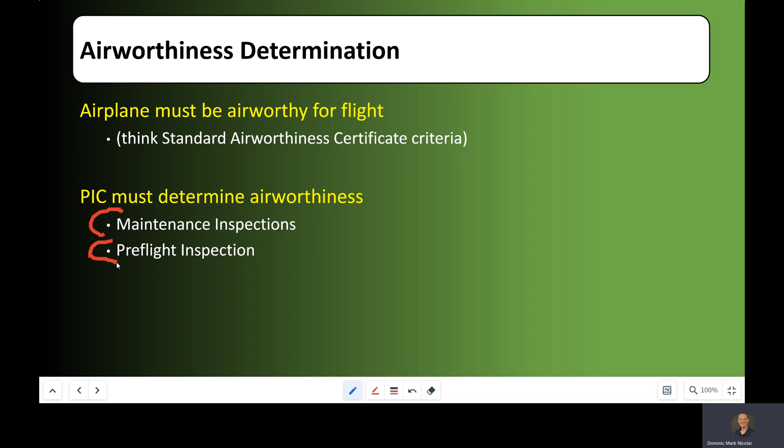Now, here's the thing that's going to be different for a lot of you. Right now, you are flying in the Western world of aviation, where we do a lot of things for you behind the scenes. Out in the real world, it's called general aviation out there. You would be responsible for looking through the logbook of the aircraft you're going to fly, making sure it has all of its required inspections done, maintenance has been done, etc. That's in addition to your walk around.

So here's the graph that it looks like here. There's really 6 different areas of the regulations that specify what a pilot needs to do to determine airworthiness. Let's start with the aircraft logbook evidence over here. First, we're looking for the inspections that are completed. AV1ATES is the typical acronym that we use for these inspections.

Next would be airworthiness directives. They've been complied with as well as logged. And the third one here is preventive maintenance, alterations, and inoperative equipment has been logged properly in the logbook.

That's something you don't normally do. It's something that we have you do at the check ride point because the examiner is asking you to prove airworthiness.

But this is only half of it here. In addition to the aircraft having been maintained properly, you have to do the pre-flight inspection. And the reason you're doing that pre-flight inspection is because you're trying to find things that are wrong with the airplane. You know you just can't stop and pull off at a cloud and figure something out if it's broken, right? You're just making sure everything works properly on there.

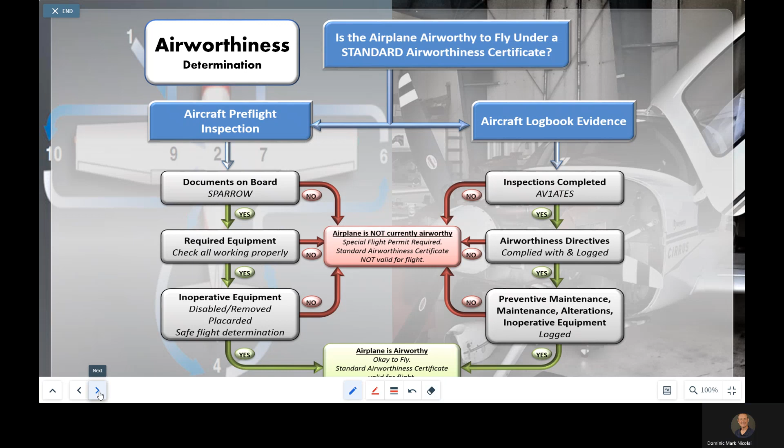Your standard airworthiness is valid for that flight. You have authorization from the FAA to conduct flight. All right, and we'll get into some more of those inspections a little bit later in the regs here.

Continuing on in subpart A, dealing with dropping objects. The FAA's got interesting regulations because they often tell you, well, you can't do something. And then they give you the exception to the rule. Right? And this is one of those examples here with dropping objects. They say, no, you can't do it. But then they come back and say, unless you do something else. Unless you take precautions to avoid injury or damage to property, then you can drop things from the airplane. So the FAA's got an interesting way of dealing with regs.

Okay, so let's try a top hat question here, dealing with dropping objects from airplane. 45 seconds here.

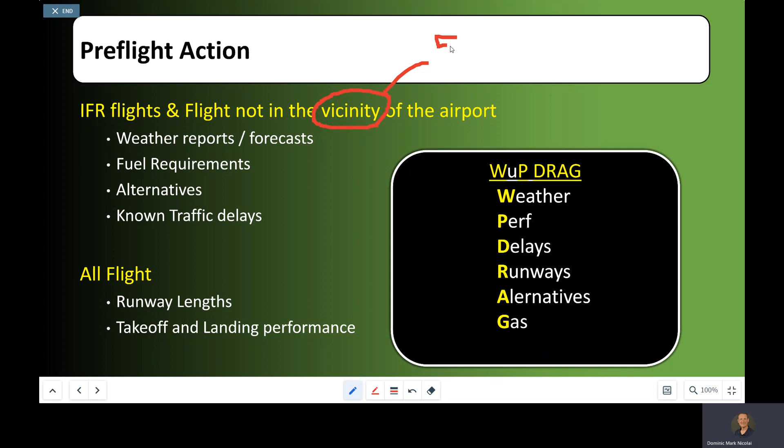My only guidance to you is from our METAR and TAF reports. METARs and TAFs will go out to 5 miles. That's my only guidance, all right? So when we talk about in the vicinity of the airport, in my opinion, if you're within 5 miles of the airport, you're in the vicinity of it. You go beyond 5, you're no longer in the vicinity.

Okay, so if you are going away from the airport or on an IFR flight, you must get weather reports and forecasts for the time of the flight. You must understand your fuel requirements, how much do you need versus how much do you have, what's your burn rate. You must have alternatives if your planned flight cannot be completed. This should also include days where potential for a crosswind makes your runway no longer usable.

Any known delays usually get passed along in your pre-flight briefing. So this is required information for IFR and anything that's not in the vicinity of the airport. Regardless, every single flight, though, you must know the runway length for the runway you intend to use, and you must know your takeoff and landing performance.

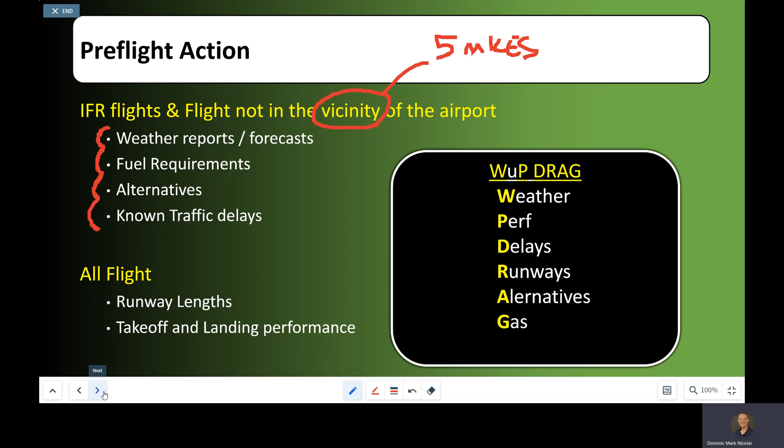And so here's your top hat question. True or false? A flight only in the traffic pattern requires the pilot to get weather reports and forecasts.

Wow, true or false? So it's an interesting question. I'm going to say it's a gray area. I like when regs are black and white. Definitely a gray area, because we do have a reg elsewhere that says you got to become familiar with all available information for any flight. Then we have this reg that says, well, if you're staying near the airport, you don't need weather forecasts and reports. So...

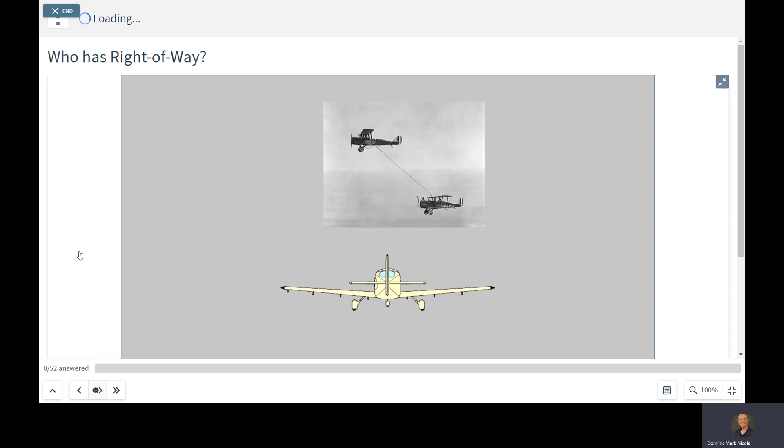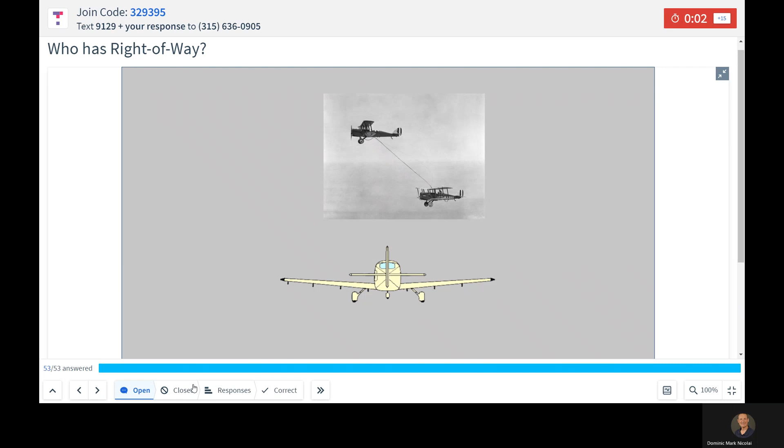Who's got right of way? This is a refueling operation. Are they plowing the ramp out there? Blowing it off? Jeez. All right, a refueling operation. While they're tethered together, they are less maneuverable.

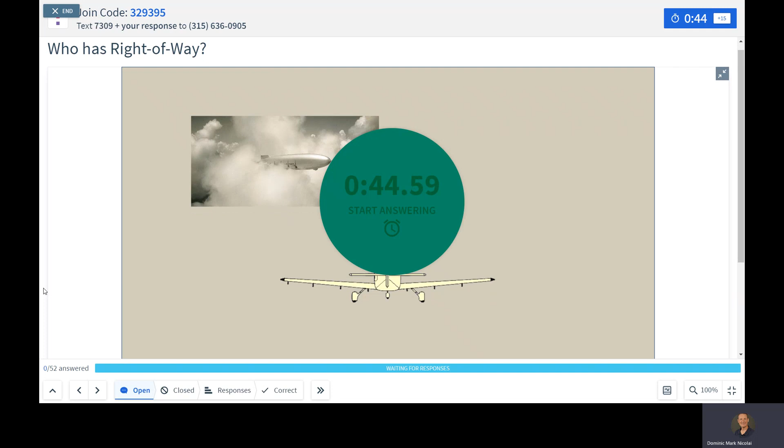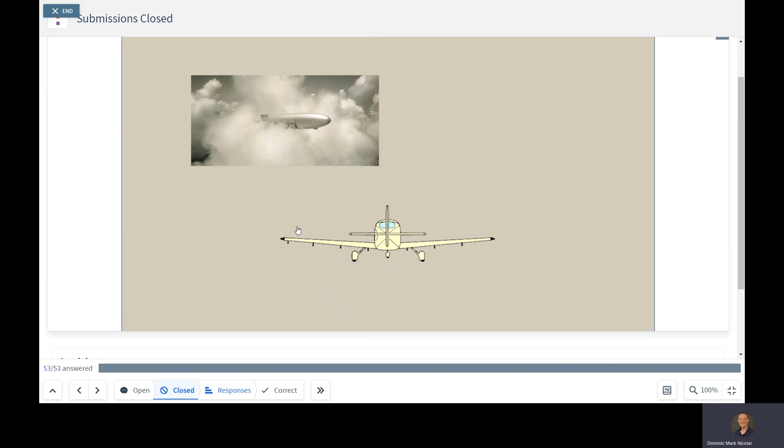Let's try another one. Who's got right of way? You're flying through the clouds. That's what you see. All right, the other aircraft is least maneuverable. So you got that one right. Nice job.

All right, here's another interesting one for you. That is an electric aircraft, solar-powered electric aircraft. You are looking at the tail of it as it's trying to fly away from you. Oh, the other aircraft is a slow-moving airplane. You have to yield to the right side.

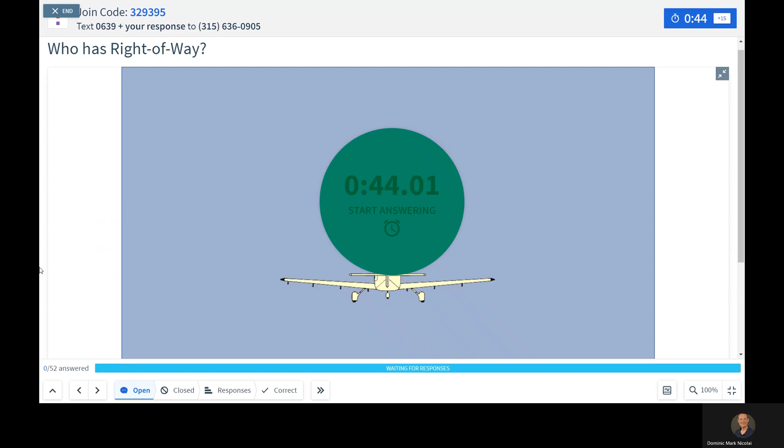All right, last one. We're looking at the front end of an airplane. You should recognize the head-on situation. No one has right of way. Both alter course to the right.

Next area is airspeed. Look at maximum airspeeds here. You can see how well you know these. So when we look at our different airspeeds, we are looking at one area that is above 10,000 feet. There's another speed when you're below 10,000 feet. And then if you're within Delta and Charlie, or below Bravo, there's another speed restriction on that. So those are the little areas that we're going to look at here.

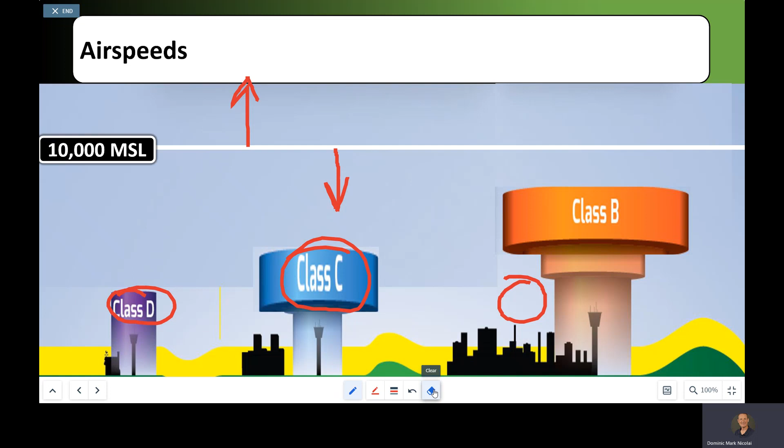I'm going to start with maximum indicated airspeed, and we are in the purple area, 10,000 MSL and above. You got some choices down there. We like to fly fast when we're above 10,000 feet.

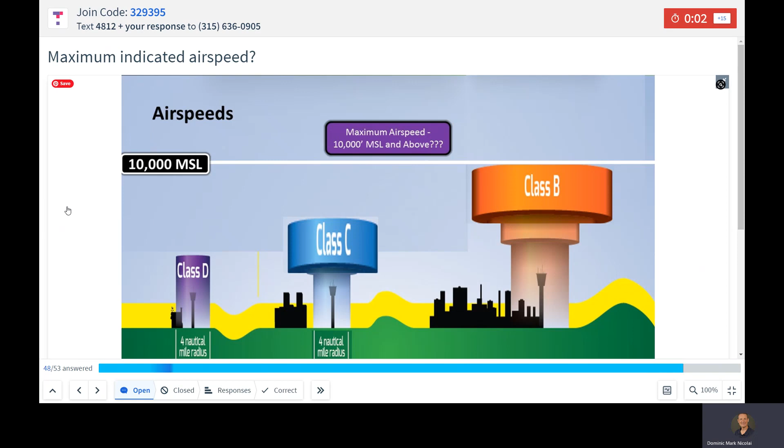All right, a bit of a split there. So the correct answer is less than Mach 1. We do like to fly fast, but we can't do sonic booms over the continental US. Now, military aircraft can do it in special areas, but otherwise we cannot. So we've got to be less than Mach 1. Once you get beyond the shore, then we're allowed to accelerate above Mach 1.

Maximum indicated airspeed. This area is within class Bravo below 10,000 feet. You're inside the Bravo, but you're below 10,000 feet.

Okay, see how you did here. No, big split there. If you indicated 250 knots, that would be correct. There are no speed restrictions in Bravo airspace. The speed restriction that's applied is when you're below 10,000 feet, you have to be no faster than 250. But there's no speed restrictions inside the Bravo, so we just default back to 250 there.

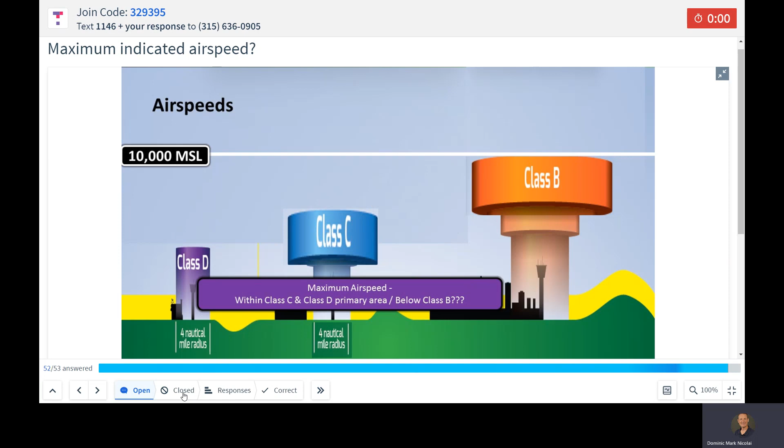200 knots. That is correct. Well done. Okay, I'm going to get through a few more things here.

Subpart B, clearances. When given by ATC, clearances or instructions, they need to be followed.

Now, of course, you as pilot in command are responsible for the safe operation of the aircraft. You might be in a situation where it's an emergency and you can't comply with instructions. Or you've got to avoid traffic and you can't comply with instructions because you're avoiding traffic. So those are allowed, but you have to obviously tell ATC your situation as soon as possible. There's also times where you just can't comply with an instruction because it would take you into a dangerous area or violate FARs. I've had ATC tell me many times, turn right to this heading, and boom, there's a cloud there. I can't do it. You've got to tell them, I'm unable to comply, and why.

You may not follow clearances for another aircraft. When you get into busy airspace areas, you might be instructed to follow the Boeing 737. That's your instruction. If the Boeing 737 is cleared to land, you are not cleared to land. You still need your own clearance.

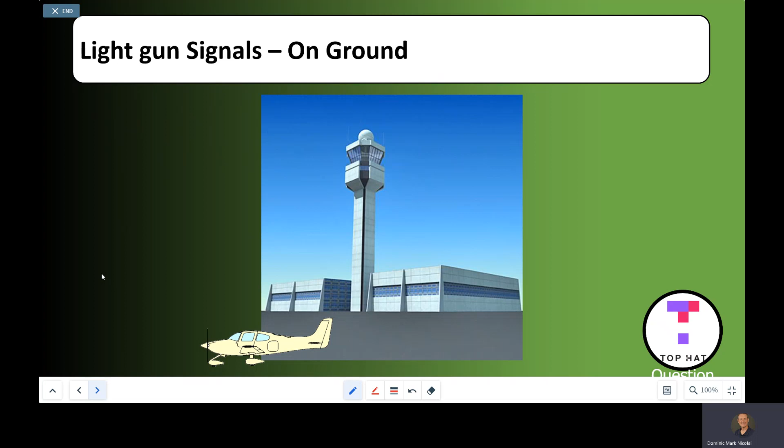So we're going to look at on the ground first. I'm going to show you some videos, and let's see how well you can get through these. Okay, so we're on the ground. My video is gone. Hold on a second, what's going on here? All right, there we go. We'll do this one here.

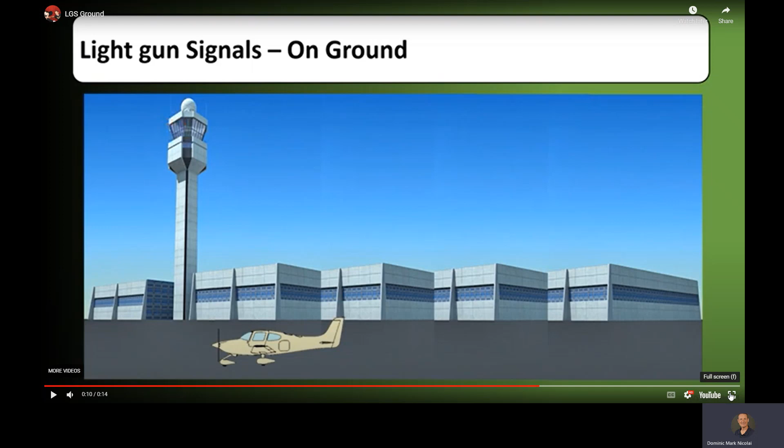All right, see how we did here. I didn't start the question. There we go. So still flashing red. And anytime something's red, especially flashing, they're trying to get your attention. Usually when it's flashing, it's some sort of dangerous situation going on.

All right, see how you did here. Well, a lot of splits. Okay, so we are here in a dangerous situation, being on an active runway. We need to get off of it. Stop here would be a steady red, like a stop light. Pick another random one here.

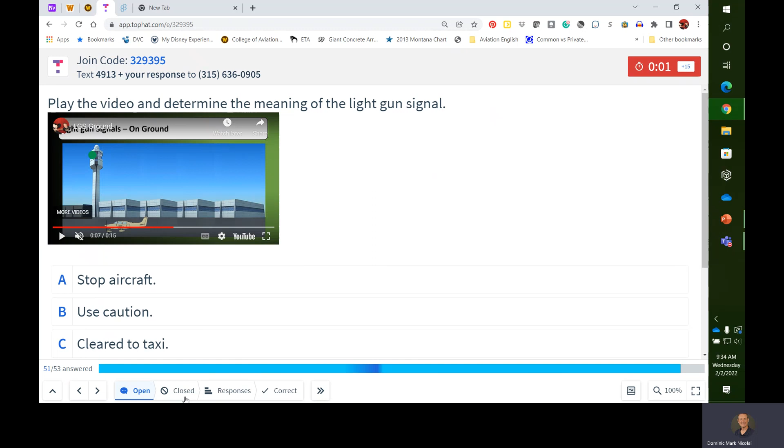Yeah, the alternating red and green is going to be that use caution one. All right, let's try a few airborne light gun signals. When you go back and review these slides, you can go through all the light gun signals there. So these are the ones that are in the air.

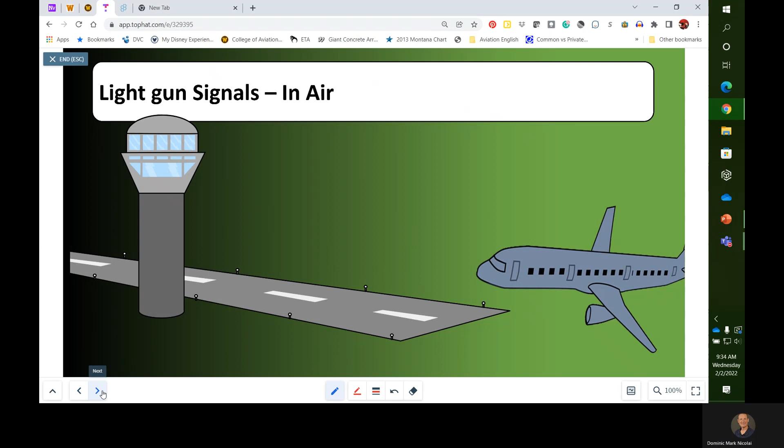So you're in the air this time, and you get this red-green alternating signal.

All right, use caution. One more random one here.

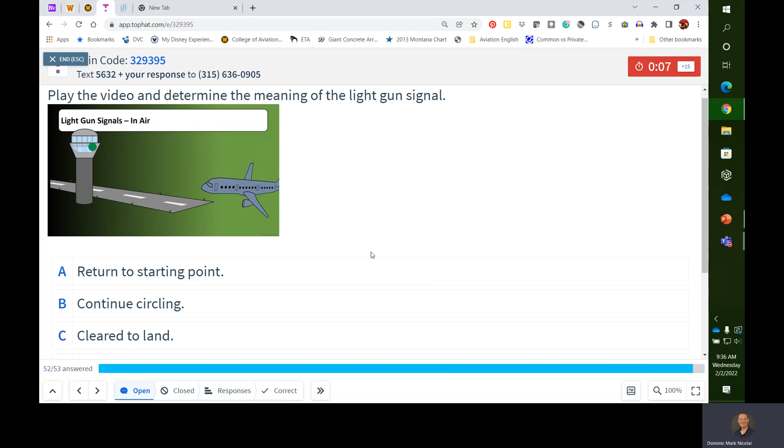It's probably the one you ought to know, a steady green, clear to land. For the exam that comes up in several weeks, you're going to want to know all the light gun signals. All right, let's keep going here.

See if we can get through a few more of these and then take a quick break. Airspace requirements: we're flying in Class Charlie airspace, or even above the Charlie airspace, we may be required to have certain equipment. So anytime you're inside the airspace, we need our surveillance equipment, both the Mode C and ADS-B out inside the airspace. Also above the airspace, you need that same surveillance equipment.

When you're in the airspace, you need two-way radio. I should just clarify the notes here: two-way radio in Class C, not above it, but in it. Interestingly, if I go below a shelf, I don't need any equipment.

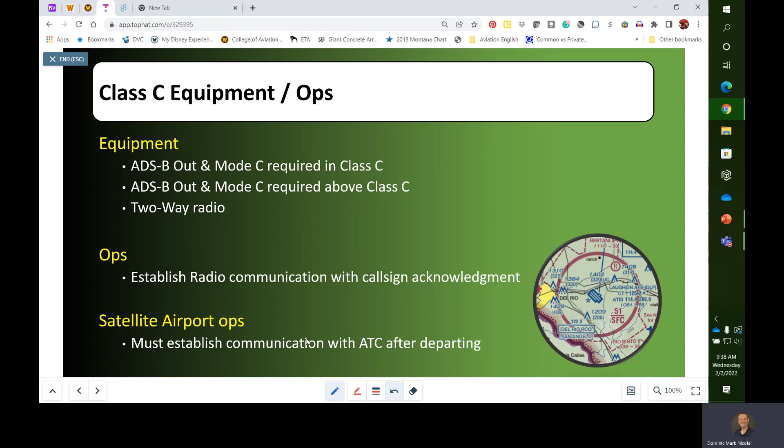We all know we've got to establish the call sign with the airport, but here's the thing you may not understand. There could be a satellite airport operating within the primary surface area. If an airplane departs from that airport, they need to contact ATC as soon as practical after departing. So in the graphic over here, there's a non-towered field, a private airstrip that's inside the primary area. So anybody over there at that airport is going to have to call up the tower once they depart, let them know they're departing.

In Bravo airspace, we need two-way radio equipment inside the airspace, a VOR obviously if you're IFR. And then within 30 miles of the primary airport, you need surveillance equipment, both the Mode C transponder and ADS-B out. And you already know we need a clearance to enter, whether we're IFR or VFR. So not really much new here other than just stressing the ADS-B out requirement. That's something that came about just a couple years ago.

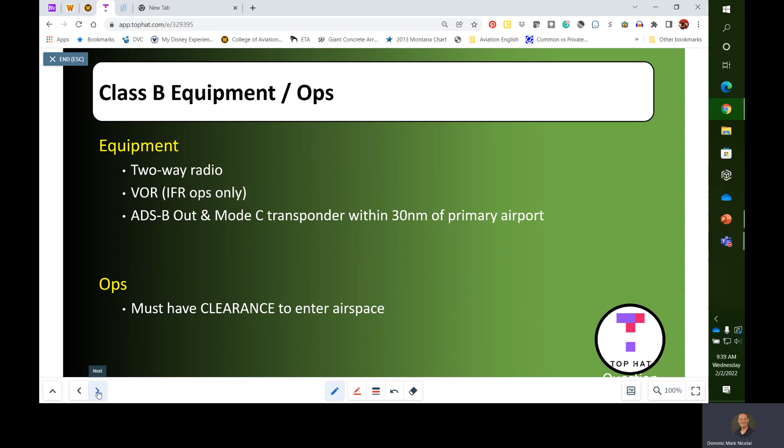So let's try a Top Hat question here. You're planning a VFR flight into Detroit Metro, a Class Bravo airport, on January 2nd. Identify all equipment required for this VFR flight.

VOT check, something you should be familiar with as an instrument pilot. There shouldn't be much new here, just emphasizing that this VOR test facility is located at select airports. You would just discover the location inside the chart supplement. Your big airports will have it. And the facility is going to transmit only one radial, that's the radial 360. It's going to transmit that radial in every single direction.